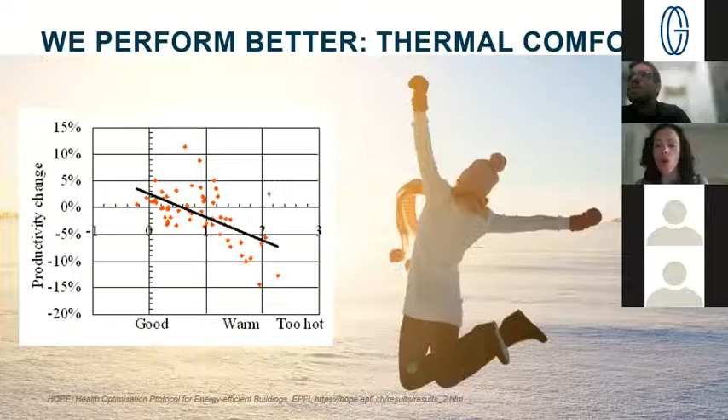This is very important as we talk to those in practice who will be implementing these strategies, or with whom we're trying to create better environments that foster wellness. We perform better with views and thermal comfort together—people who had views but were also thermally comfortable were actually more focused. So there are cross effects between these variables, and it's very interesting.

I'll give you access to these slides and the references if you want to look back at them. We also perform better, as many of you might be familiar, with better indoor air quality. The Harvard School of Public Health has published a large amount of data showing that the more CO2 levels increase, the worse we perform—and the same with PM, particulate matter, etc.

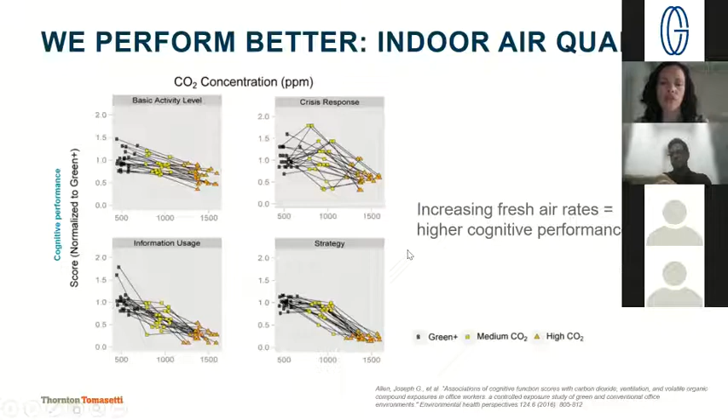It's very important—indoor air quality also leads to higher performance. We perform worse if there's a high PM count, particulate matter. Cooking is, in most of our countries, still a driving source of particulate matter in homes. Most of us still cook with gas, or light candles. That means we are generating particulate matter out of combustion regularly in our environments. It turns out that high levels of particulate matter really decrease our cognitive performance.

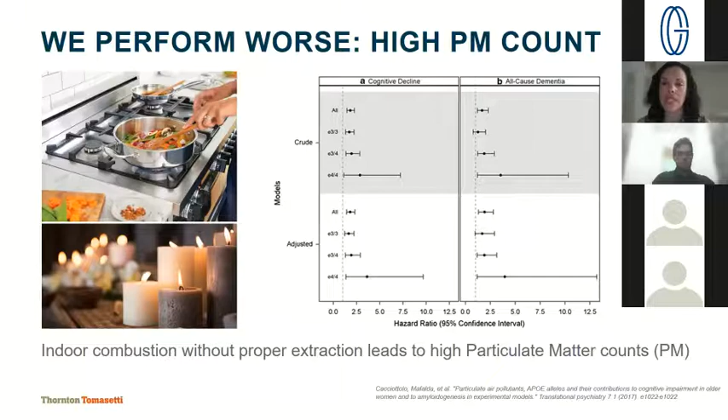We also perform worse where there are fires—any of you in San Francisco or Australia know this. High particulate matter outside, outdoor air quality, can also have a great impact on how we perform, because outdoor air quality eventually becomes indoor air quality.

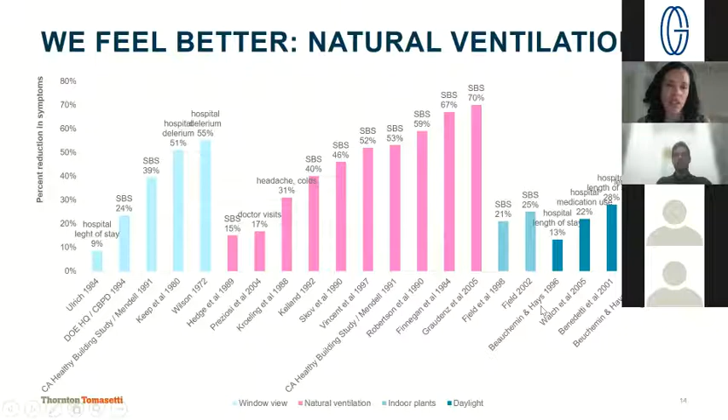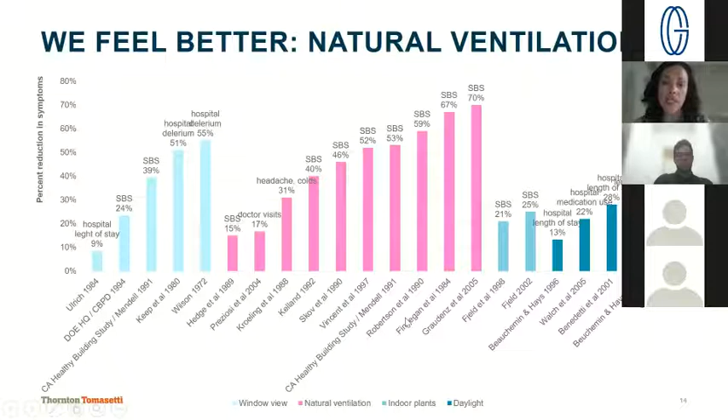Natural ventilation is one strategy that makes us feel better. There's a lot of research—this particular research is a bit outdated, only going up to 2005, but there's been even more research in the last 20 years—showing that using natural ventilation has a significant decrease in sick building syndrome symptoms, as well as other strategies like indoor plants, daylight, and window views. But in particular, natural ventilation is another strategy to use.

Let's have an all-glass building. Architects will render buildings without any shades, making them look all beautiful and transparent, and clients fall in love with that transparency. The reality is that people need shade, and the more glass you provide, the more shade there will be.

So how can we make sure that we're designing buildings that align with what research shows and maximize occupant performance? And how do we use that argument?

Oftentimes, for those who have had to do a payback analysis for exterior shades in a building—when we propose exterior shading in a project, someone will ask how much energy it will save. Depending where you are, electricity and gas are often so cheap that there's really no way to justify exterior shading with a monetary argument. You often find the payback is 20 or 30 years, and people say it's not worth it.

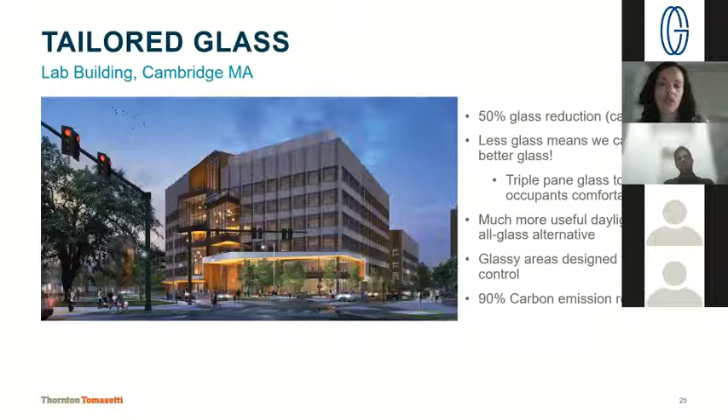The glassy areas were designed for glare control, and this was actually fine-tuned even further to make sure that occupants down here would not suffer the impact of direct sunlight. On top of that, this entire building has been designed to reduce carbon emissions by 90% with respect to all the other lab buildings in the area.

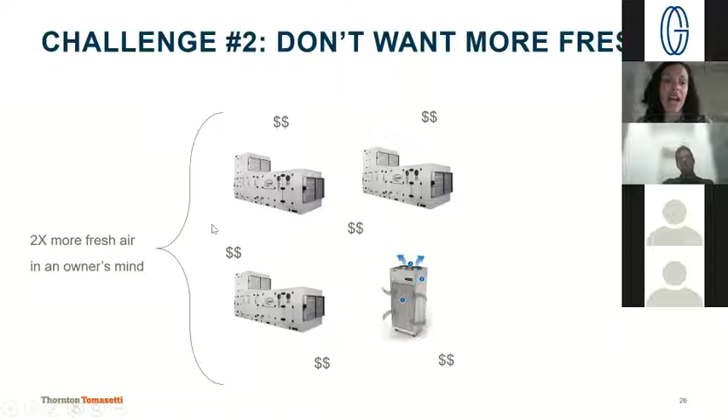This is the second challenge that I deal with just about every day. And the reality is that people don't want more fresh air for some reason. Despite COVID, people think that more fresh air actually means that I'm doubling the amount of equipment that I have in my building, and that's it—I'm just putting twice as much and I'm not getting anything back.

But as we talked about, two times more fresh air is actually going to have a really good payback if you have more productive employees—if you have employees that actually come to work and don't get sick because there's good ventilation. So despite COVID, there really is still a denial to provide more fresh air. There could be an argument, and I've heard this many times and we've tackled it, that more fresh air means we're going to need more energy to heat it or cool it. The reality is that heat recovery is pretty good these days, and so more fresh air does not necessarily mean that much energy use in a building.

More fresh air can mean a good resilience strategy, particularly if you're incorporating natural ventilation, either as a standard to the design or as a backup to the design. I like to show this example.

This is a hospital in New Orleans where Katrina hit. The nurses, when Katrina hit, there was no power in the hospital, so they had to go around breaking the windows with chairs and putting the patients right next to the broken windows so they could breathe more fresh air. Can you imagine? We could have just incorporated natural ventilation into this design and we would have been better off in terms of providing better ventilation.

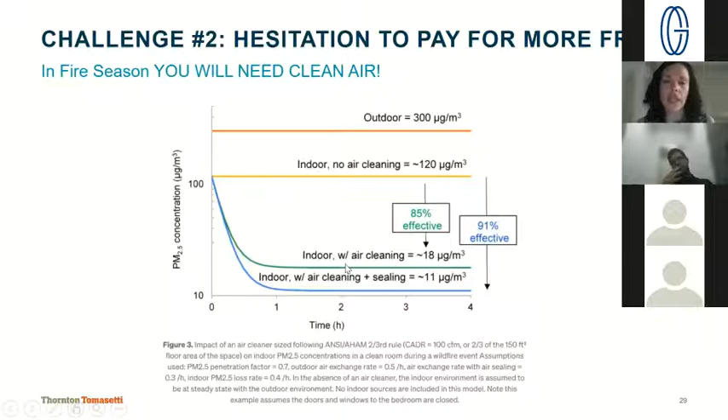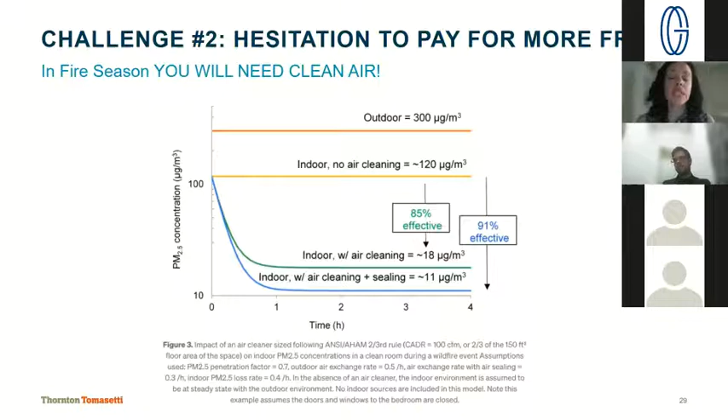This is research done by Elliot Gall at University of Washington, where he has done a fair amount of research on what it would take to reduce particulate matter in an interior building through air cleaning, and sealing up the building. Air cleaning will be needed if your outdoor air is not clean enough. Having grown up in Mexico City, I know what that means. You need to filter the outside air if you want clean, fresh air.

Now, how do we juggle all this together? How do we make decisions to maximize wellness with as much impact as we can in building design? This is what I specialize on, so I'm going to give you a sneak peek into the type of work I do. That is focusing on early design, early in the design when architects are starting to imagine their building, when owners are only starting to imagine what their new place is going to look like. That's the best place to incorporate wellness strategies so they don't feel like an add-on at the end, and we get everyone on board early on. So I specialize in running simulations early in design, when we're just doing massing studies for instance, to try to influence that. I'll show you some examples of my work there.

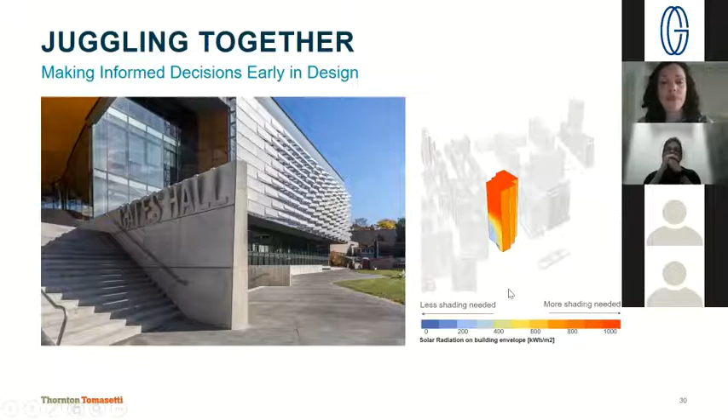This is an example showing areas where we need more shading or less shading, just as a massing strategy. This is a project where we had an owner who wanted to go all glass for a residential building, and our team was trying to push for having less glass, similar to that lab building. Using simple simulation strategies, for all of you daylight experts this is something you do every day, more sophisticated on the research side than the consulting side, there are ways to show that the all-glass option compared to the punch windows option provides just about the same amount of daylight but far less glare.

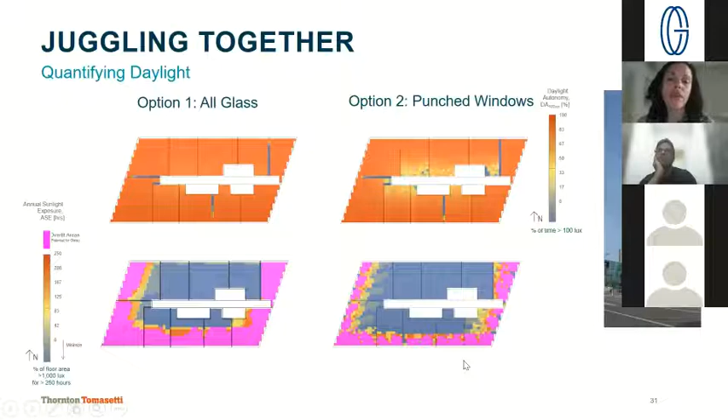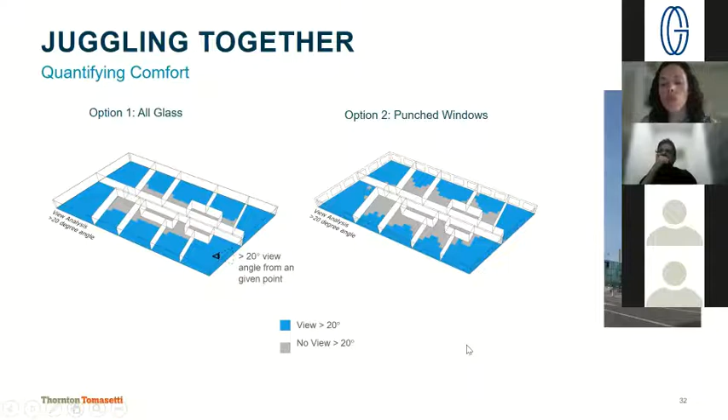Glare is the areas that are overlit. You could have a much more comfortable environment if you go for an approach that doesn't have all glass everywhere. They also ask us, well yes, but the views are going to be far fewer. Well, not really, and there's a way to quantify views, which is something our team did. Sure, you're going to have more views if you're at the back of the apartment, more than 20 degrees angle to get that view toward the skylight. But in reality, you don't lose that much of views if you reduce the amount of windows you have. Quantifying it and showing it as a number is a much more powerful argument than just saying 'not really' without data to back it up.

Additionally, we can add the layer of comfort. This was an area in a building in New York, where in the wintertime we know an all-glass building is going to create a cold downdraft really close to the windows. You can see these areas right here will need perimeter heating installed, and they're going to be cold inevitably. Whereas if you incorporate more solid wall and less glass, it's actually very comfortable even before introducing perimeter heating. So you're creating a space that's conducive to wellness and less expensive, because you're saving money on one system. If you design well, in certain climates, and certainly in New York, you can save on the use of perimeter heating.

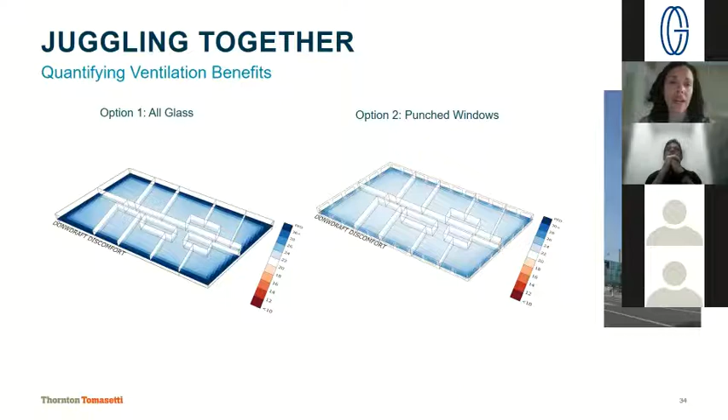This is how we quantified it. We knew the argument had to be financial, again, because we know we're not going to win with the argument of energy savings. So we said, well, these are the occupants most impacted by the facade design decisions. What we do on the facade for someone sitting here isn't going to make much of a difference. So let's say this was a medical building.

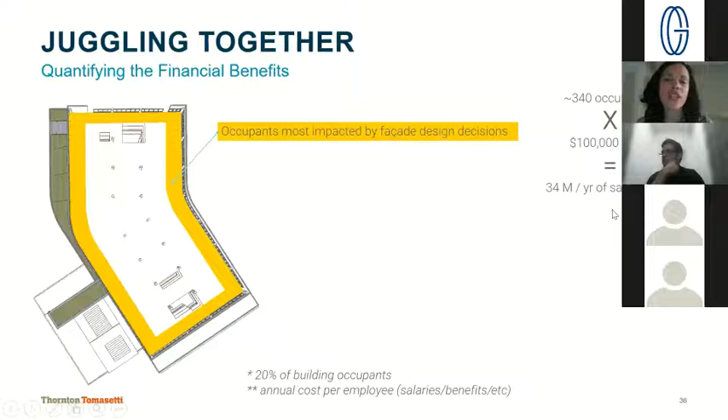You have roughly 340 occupants there who make roughly $100,000 a year. These are doctors, so they're definitely making more than that, but we decided to choose an average. So we're talking about $34 million a year of just salary costs.

Imagine we're only increasing—you saw my numbers, and the increase in performance was in the vicinity of 5 to 10 to 15%. Let's just say we only get a 1% productivity increase by the occupants in the perimeter. You will already be saving $340,000 a year.

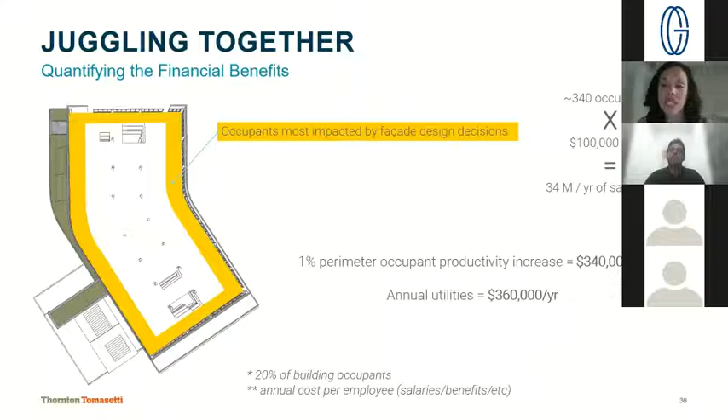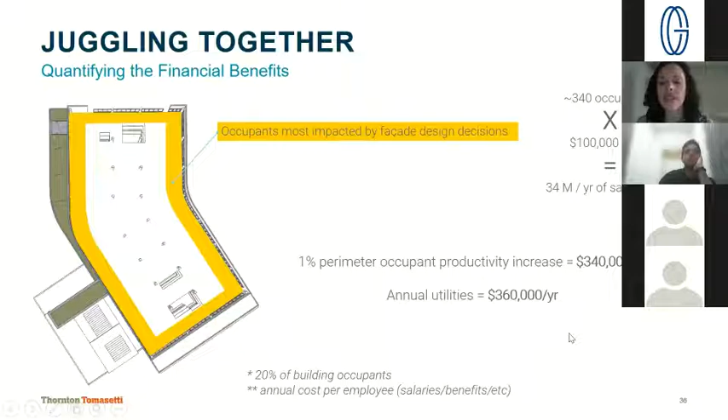Your annual utilities for the entire building—how much you're paying for energy for the entire building—is $360,000 a year. So this is already comparable to your entire energy bill of a medical building. It puts it in perspective. Our energy savings argument really isn't the place here, because we'd be saving maybe $2,000 a year. But from a health standpoint, from a wellness standpoint, there's really an argument.

Now the research is happening. The Harvard School of Public Health is doing research. There are great institutions, many of you doing great research, and we'll learn about this through the program at this conference. So the question I'm leaving to you is: how can we bridge that gap between the research and the practice and the owners, so we can quantify these benefits better and lead to better performance in our buildings? And with that, that was it.

I'd like to open it up for questions and a conversation, though I don't know how that's going to happen. I see some comments on the chat, but haven't read them, so I'm going to wait for someone. Elizabeth, can you walk me through this?

Yeah, thank you for that amazing presentation. It looks like Mark has the first question. So Mark, did you want to unmute yourself and ask your question?

Certainly, well thank you so very much for your presentation. I think back in the 1980s, I was lucky enough to have a professor who got on board with Fitch's work and really drilled this in at the very basic level. I also think one thing we never talked about, certainly in my own practice, which has been abandoned these last 30 years, but also in my work as an administrator in the faculty, is that there's a need to modify the environment.

I don't really think about Thomas Kundig, but I kind of like that as an image—that somehow there is a means by which we can change our environment, and by doing so we're tuning the space to our sense of well-being. I'm wondering exactly how important that is, or maybe I'm just imagining it because I like to touch my buildings. Are you referring to a more personalized space? So the ability of creating our own space?